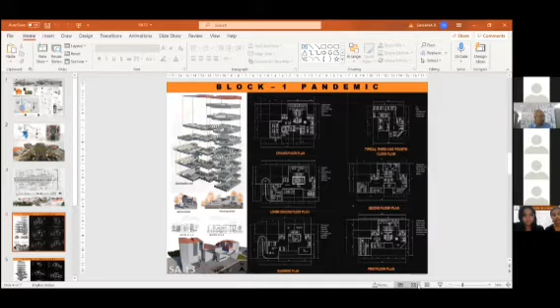Let me start with our concept. It's basically the diamond and the phaento. Since Gujarat is the hub of diamonds and phaento represents their culture, and both carry the pride of the state.

This gave us the opportunity for unfolding possibilities such as the sharp design and the use of colors. Coming to the execution, here, okay.

Coming to the execution, from both diamond and phaento, vividity is a strategy which represents vibrant, striking, and liveliness. To give justice to the strategy, we chose steel frame and polycarbonate panels as the skin of the structure.

As we all know, the site location is Kanderi in Gujarat. According to the site analysis in the brief, the site is an agricultural land which comes under gradual development with moderate traffic, and the water body in the southwest creates the microclimate, which is a pro element in the site.

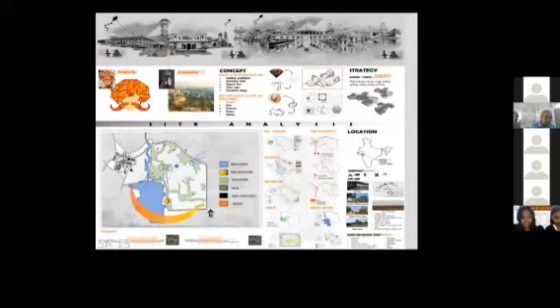The topography of the site has the terrain which creates the natural drain line. And the site selection is according to the pro-climate, the maximum wind direction, and also the major accessibility to the hospital.

To continue with the master plan, basically there are three main blocks, namely pandemic, inpatient, and outpatient block, along with the small doctor residential block. And there are three parking facilities on ground.

One is for residents and staff members, and another is for patients' parking. Each accommodates 50 bikes and 50 cars respectively, and also there is one separate parking facility for ambulances beside the outpatient block where nearly 15 ambulances can be accommodated.

There are also 4 lanes which run throughout the blocks, where 2 lanes on the left are for entry and the other 2 are for exit, and all blocks have basement parking.

The center plaza has been used as a green space, since in a hospital, along with patients, even visitors are present and there will be a constant flow of traffic. So in order to divert them, we have given a large center green space with seating in it.

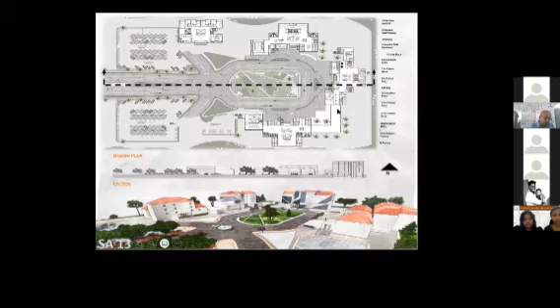Each block has a separate entry and a drop-off point from where people can exit from vehicles. The outpatient block and inpatient block are interconnected through a bridge. And yeah, that's all for the master plan.

Let me explain about the pandemic block. It is a G+4 structure with a lower ground and a basement. The basement is placed with the mortuary with limited access, and also services like the HVAC system and others are present in the basement.

Coming to the lower ground floor plan, there are the radiology and pathology laboratories.

Everything is present in the lower ground floor plan, and also in the rear side of it are the services. The main entrance is through the ground floor plan, and it also has a separate emergency entry.

In the front panel of the ground floor is the rapid COVID test space, where the patient can just drop in, give the test, and leave from the drop-off spot without entering the building, since it's a pandemic block and there are issues of sanitization.

Behind the rapid test block is the laboratory, which is divided into dry lab, wet lab, and the exit point. In the pandemic block, the first, second, third, and fourth floors are all separate divisions based on the seriousness of the COVID patients.

The first floor comes with a general ward where there are asymptomatic patients, the second floor has double sharing rooms, and typically the third and fourth floors are the ICU blocks.

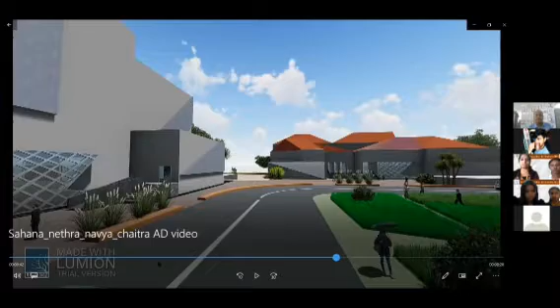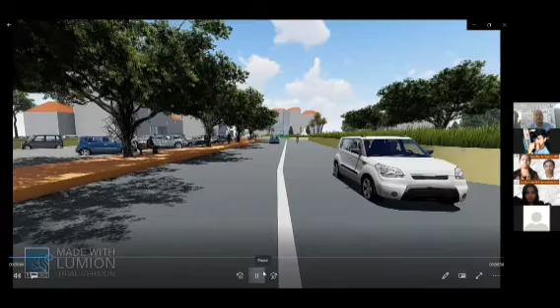You can give the commentary if there is no audio background. Can you explain wherever required?

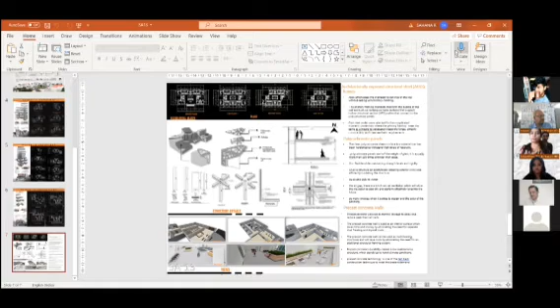There are separate entries for COVID and non-COVID inpatients. You can show in the plan. Yes, sir.

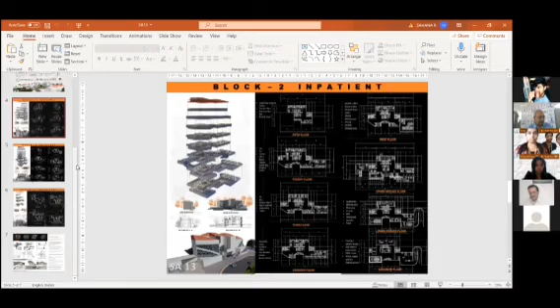When a person is detected non-COVID, there is a separate entry for the COVID block and the outpatient and inpatient blocks. When a patient comes, you don't know whether he is COVID or non-COVID, so there will be a check, RT-PCR testing, and waiting, and after 6 hours it will be declared whether he is COVID. So till that time, how the patient is moving, that I want to know.

Yes, sir. Because when patients are coming to your hospital, they have not taken the RT-PCR test elsewhere. They are feeling ill and they are coming in. So this is the practical situation of tackling how you are separating COVID and non-COVID from the very beginning. Have you thought of this?

Yes, sir. There is a separate entry for the COVID block where they directly go without entering the other blocks. They will give a test and wait there. Once they get the result, they'll move back to that area — please highlight that area. Yes, sir, we are showing it.

For the COVID block, in the front panel we have provided a quick rapid test, for people who are going to give the test, not necessarily patients. They give the test in the front panel and leave by the drop-off point. Patients who are going to be admitted will be inside; that building will be sanitized and sealed, and it will not be open for the public.

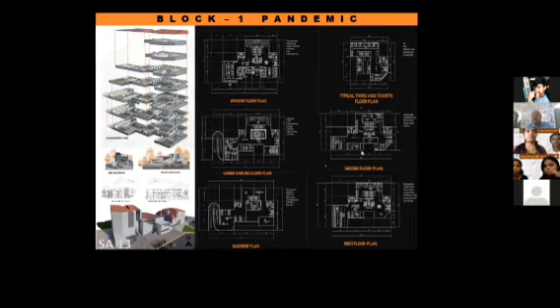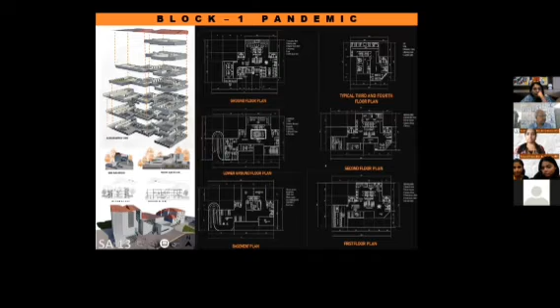Yes, Trinetra and Shahana, you and your team have shown a presentation where you separated out the blocks and other things. Tell me one thing, I don't have many questions.

You have used steel in the structures and polycarbonate sheet. Are you talking about the red ones on the roof? Are those polycarbonate sheets? Hello, I can't hear you. No, ma'am, those are not the polycarbonate panels.

So what are those polycarbonate panels? They are in the front facade, ma'am. Facade, facade, ma'am. Okay.

No, you talked about some skylights also. So are these the skylights you're talking about? These are the polycarbonate panels which can be seen in the elevation of the building.

Instead of glass, you could have used glass also — so instead of glass you used polycarbonate, is it? Yes, ma'am, because they are much stronger than glass and can be fixed easily.

But stronger maintenance is again an issue. Anyway, that's a different issue, but you have used polycarbonate. See, your plans are so tiny, we could not really see properly.

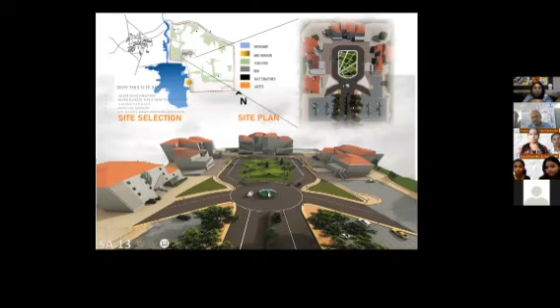So can you go into the plans once? Yes, ma'am. So this is an inpatient block. I just can't see anything like these rooms inside, and you have given a lot of space inside for corridor or what? Because the stretcher needs to rotate and go inside. What are the spaces? Can you just blow it up? Yes, ma'am.

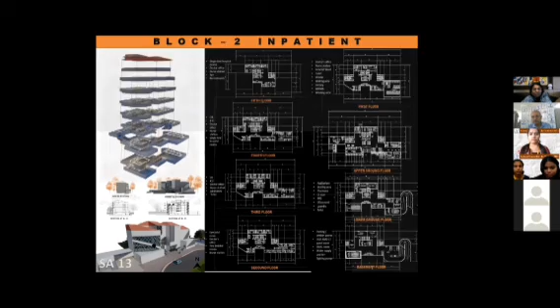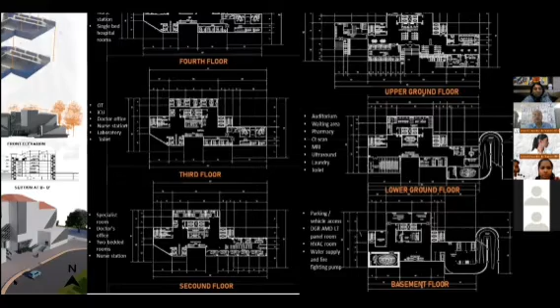As we can see in third floor, there is the staircase and lift. Okay. Say third floor, where is the staircase and lift? Yes, ma'am.

In the fourth floor, as we can see, there are two staircases at the two sides of the building, and there are 4 central lifts, 2 are service and 2 are passenger lifts. And this third floor has 2 ICUs, which is directly connected to the OTs. There are 2 OTs, which has dry lab, wet lab, and also changing room for the doctors. And every floor has a nurse station. There are 2 bedded rooms in the second floor, which also has toilets attached.

Anyway, so your basic planning is the cores are on the 2 sides. Cores are in the center, yes ma'am, 2 sides and the center. The maximum part is used in your cores, right? Yes, and only at the outside some few rooms, as I can see, are there, isn't it? Yes, so the efficiency, you just check it out. I feel that it needs to be more efficient in planning, that's what I want to say.

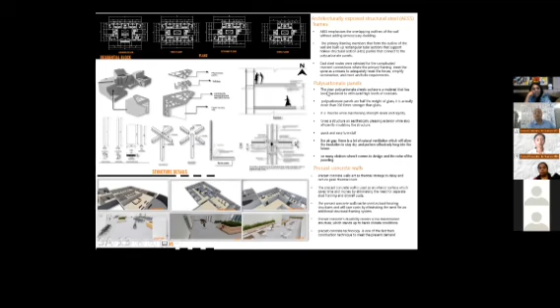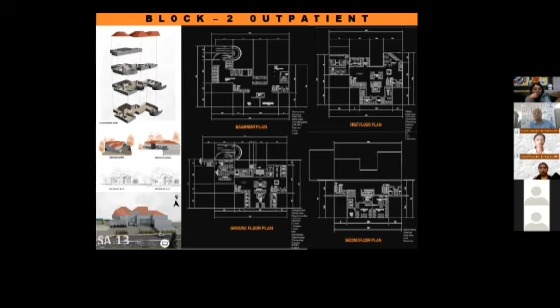Fine. Can you go into the section? Forget about structure, can you go into the section once? Have you drawn sections? Yes, ma'am. Not these, but they are really small. Section of the buildings? Yes, ma'am, we have done. Why have you made it so small? Not visible.

What is the height of the building? I mean, how much height have you taken? Each floor is 3.5 meters, ma'am.

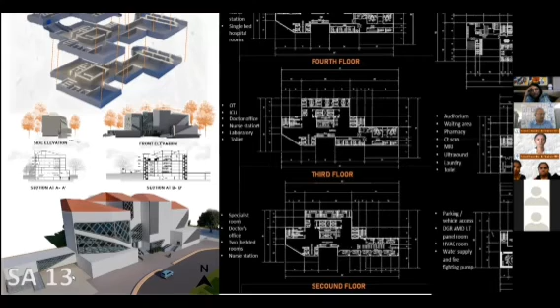Have you provided AC anywhere? Ma'am? AC. Yes, ma'am, AC have you considered? Okay, yes ma'am, yes ma'am, we considered that. So those AC ducts will go, or it may be ductable split, because in your brief those items are there, like whether AC will be considered or not. And with 3.5 meter height, if you are considering AC with ductable splits or whatever, that may be a bit less. So anyway, that's all I think I can say.

But you have made your plans very small and not really readable, and also the sections. Okay, next time when you give it, it has to be such that whoever is seeing it is able to understand, because it is not readable at all. Okay, thank you.

Now, Dr. Deshmukh. Yeah, no, I don't have any questions.

I just wanted to tell them that, see, this is a presentation drawing, so don't treat your plans as working drawing plans. Because what I see on those little plans is all the dimensions all around. I think when you're presenting in a competition, it should be a presentation drawing rather than a working drawing. So that is what I would like to comment. And all other things seem to be all right. Thank you very much.

Thank you, sir. Mr. Bhattacharya. Not much of a comment.

Only again a very common person's perspective. Somehow I felt that the central area or landscaping etc. got slightly more preeminence compared to the main project. So that was how I perceived it as a very common person. And overall, I would have preferred something different than this polycarbonate as well. Slightly, I am a bit apprehensive. But you have tried with steel etc. Some thought on modularization or prefabrication would have further enhanced the things. Otherwise, it's okay, looks good. Thank you.

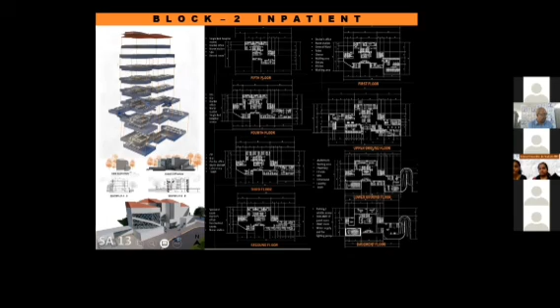Thank you, team. So you have heard what the juries have advised you.